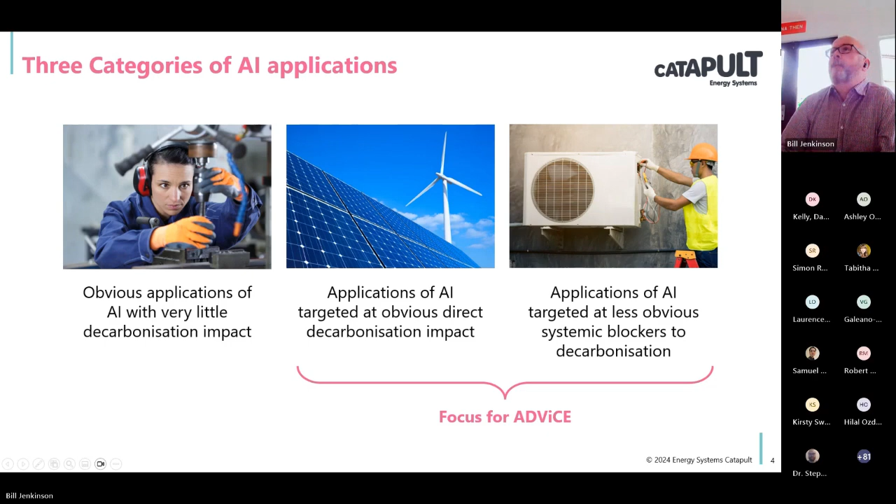For this particular view, we're looking particularly at the one highlighted as number 1, which is unlocking domestic decarbonisation. There are other calls and other challenges highlighted here that you can read at your own leisure.

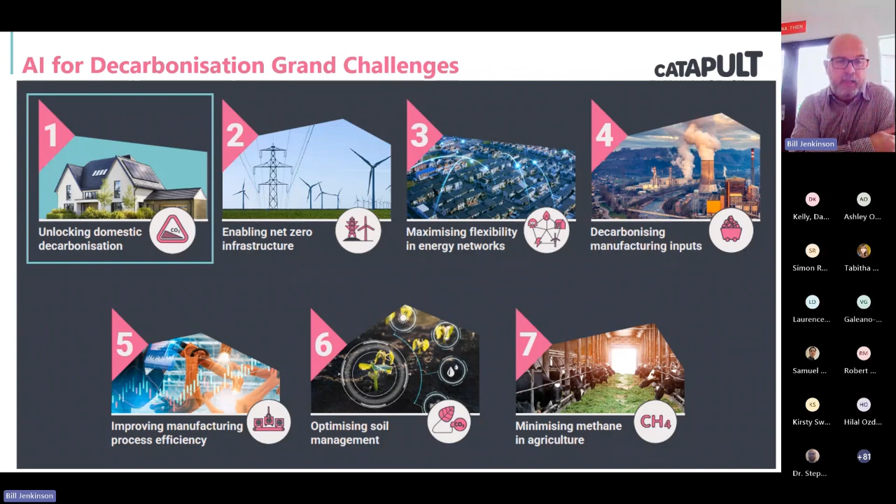So the big headlines here: 80% of UK homes are heated by natural gas currently, and 80% of home carbon emissions come from heating. This excludes lifestyle choices, which are around maybe flights, travel, or diet. But what we're saying is that 80% of the actual home's emissions are from heating. Gas boilers generally have a 15-year life expectancy, but we are racing towards 2050, and we know by 2050 we need to have reduced carbon emissions from heating by 95%.

We recognise that there's no silver bullet, but we also recognise that heat pumps and district heating are the leading low carbon solutions for home decarbonisation currently.

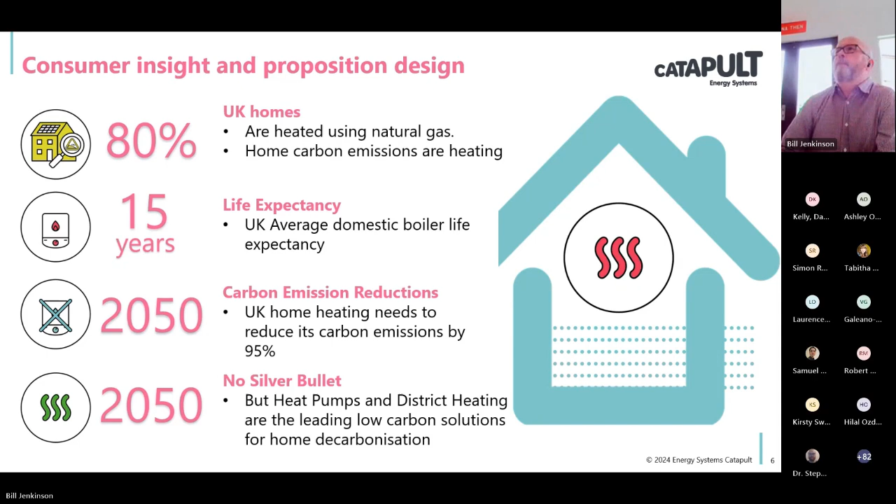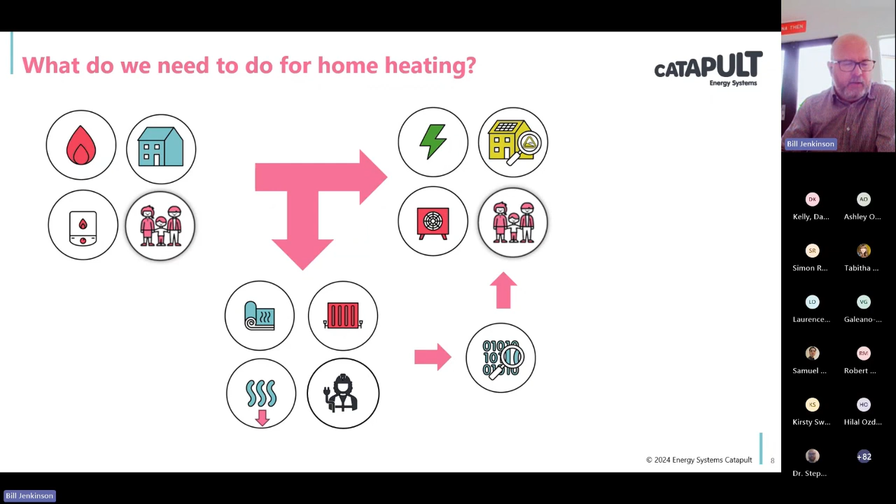So the first topic we're going to get into today is heat pumps. What we're looking at here is what we need to do, and the thorny issues with heat pumps. We need to move from left to right, from gas boilers to electrically powered heat pumps, from fossil fuel boiler solutions to solutions that can harness renewable energy sources.

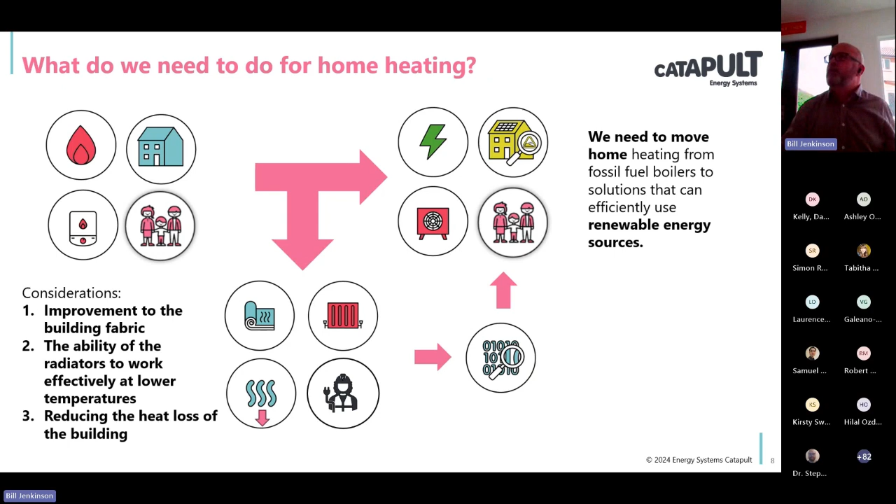But there need to be large design considerations, and installers need to consider more about how radiators work at lower temperatures, but also reducing the heat loss of the building overall through improvements to the building fabric. This all creates data that needs crunching to actually do careful design.

So this is an example of how a gas boiler works and how a heat pump works, in terms of what the kilowatt input would be, what you get out of the boiler, and what the typical cost per hour would be for a gas boiler compared with a heat pump.

Now worryingly, you'd say at this point, wait a minute Bill, it's always going to be more expensive to run a heat pump than a gas boiler. But we're using this SCOP of 3 just because it's simple, and it gives you a simple idea of how a heat pump actually works. So we take 1 kilowatt of electricity, we have 2 kilowatts of renewable energy coming in, and we get 3 kilowatts of heat out.

This gives you an overall idea of how it works, but we can do lots of things to determine how we're going to improve this heat pump value back to the end customer. So if we look at the SCOP, the seasonal coefficient of performance, we can improve it, or we can adjust the price we're paying for electricity versus gas, known as the spark gap. The other thing this demonstrates clearly is the high carbon impact of gas boilers compared with something like a heat pump.

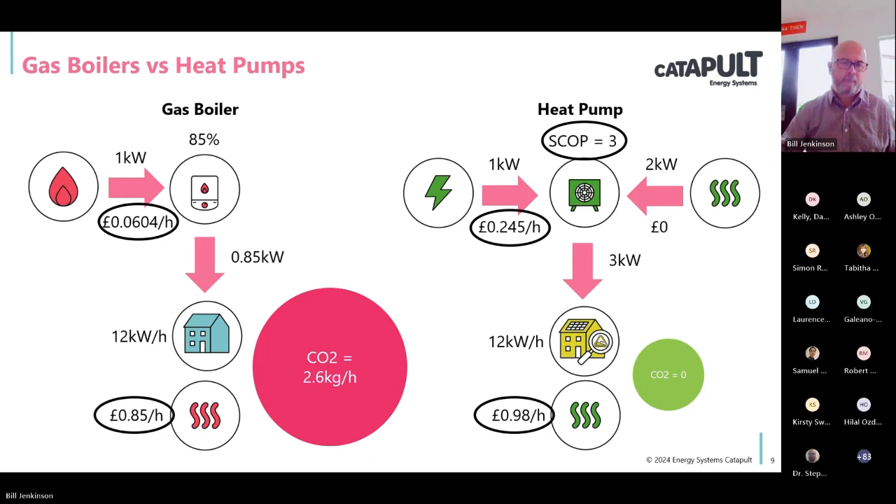So why is designing a heat pump important? Most UK homes at the moment, as we've said, use combi boilers. These are instantaneous hot water devices, so once you turn your tap on, the boiler fires. It instantly heats cold water to hot by using high intensity energy sources.

Generally these boilers are oversized for space heating, and installers have never really had to consider the design of the heating system in relation to the size of the boiler. Gas boilers generally are one size fits all, but this is not the case for heat pumps.

If heat pumps are undersized, they will not provide enough heat, resulting in high heating costs and ineffective heating. So I think we see this in reports quite often, that heat pumps don't work. They do work, they've just been designed badly or specified badly for the scenario they've been put into.

Oversized heat pumps can also be problematic. What tends to happen, if you understand how a heat pump works, is that you won't get the full benefit of the heat pump because a lot of the power is used with the compressor starting up, and you don't get the full advantage of the renewable heat that's there to be harvested. So if you get large cycling, it leads to poorer performance and higher heating costs.

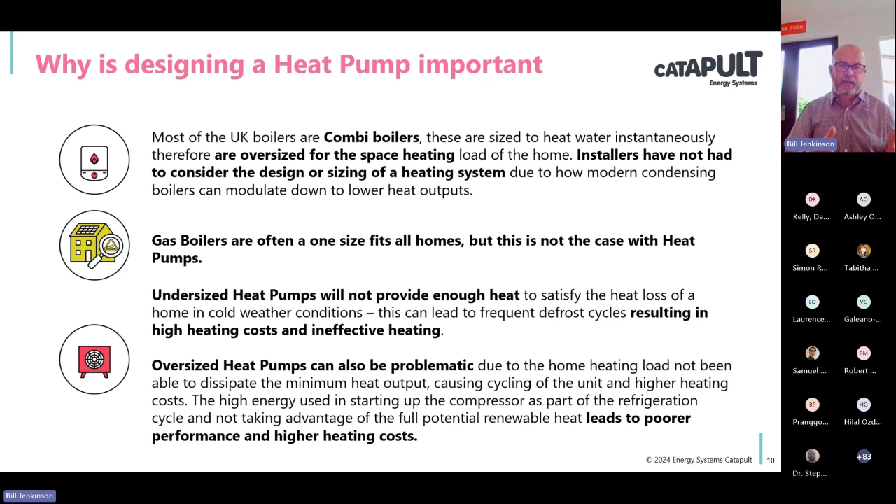We've tried to map this in terms of systemic blockers to rapid heat pump adoption, which are around design challenges, leading to complex and time consuming installations. This leads to negative perception, but also high upfront costs. There's a skills gap that's been recognised here, as we spoke about. The sizing of heat pumps is difficult, which also leads to negative perception, because if you don't know how to size a heat pump, you're not going to recommend one to an end customer.

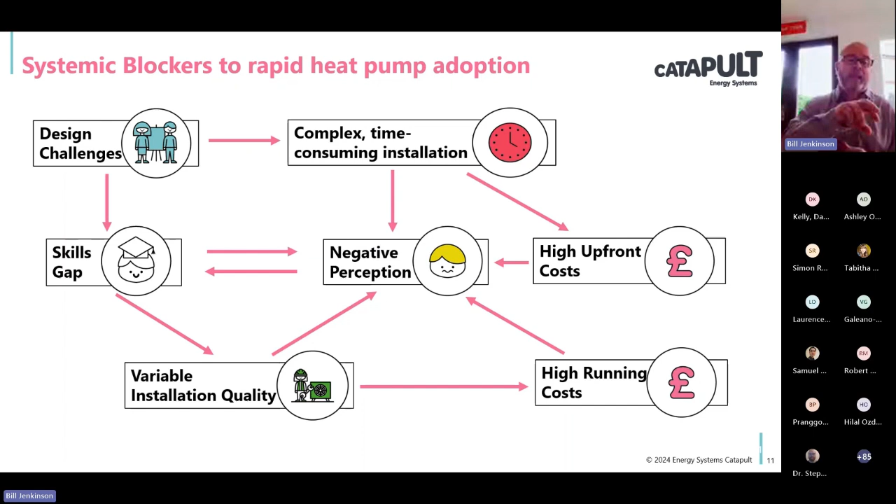There's variable installation quality, which can lead to higher running costs, which again leads to negative perception of heat pumps. So what can we do about it? I thought it'd be useful at this stage to actually show the as-is journey.

So generally, if you're a customer and you ask an installer for a heating solution for your home, they're going to recommend a gas boiler. If you're really interested in a heat pump and you go to an installer and ask about a heat pump, you're probably going to get recommended a gas boiler anyway.

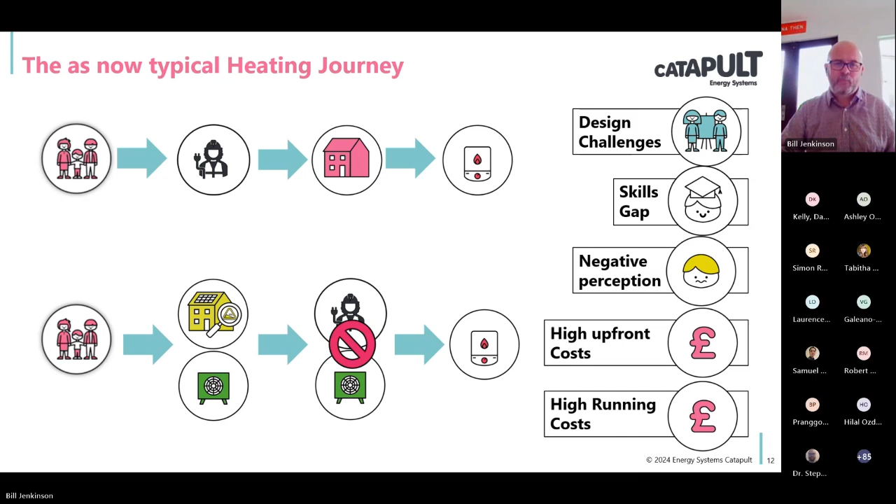If you're lucky enough to find a heat pump installer, what ends up happening is you end up with quite a long process compared with a gas boiler, the as-is now journey, because you've got some design challenges, complex time-consuming installation. We know we'll get a variable quality of installation at times, and there are higher upfront costs and a higher running cost.

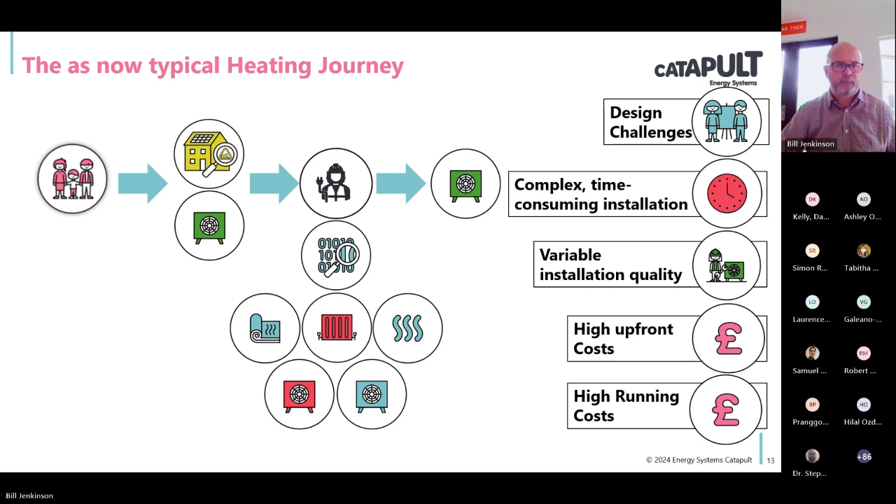What does this really mean for a heat pump, and how AI could be used to actually size a heat pump more correctly and bring in bigger data sets? We know at the moment there's lots of data out there about existing housing stocks. This will grow in the future, and we will get better at feeding the AI solution, which can better predict what these houses need. So you've got the bits about housing stock and the fabric, and how the fabric and the radiator sizing can be fed into this AI system.

And then the heat pump characteristics can also be fed in, which leads to a direct AI customer relationship, which then can inform the installer about the right heat pump for the right home. This will eventually lead to lower installation costs, less human error in design, an OEM-agnostic, manufacturer-agnostic heat pump best fit. It'll lead to improved heat pump performance and leaves installers to focus on what they actually want to do, which is install.

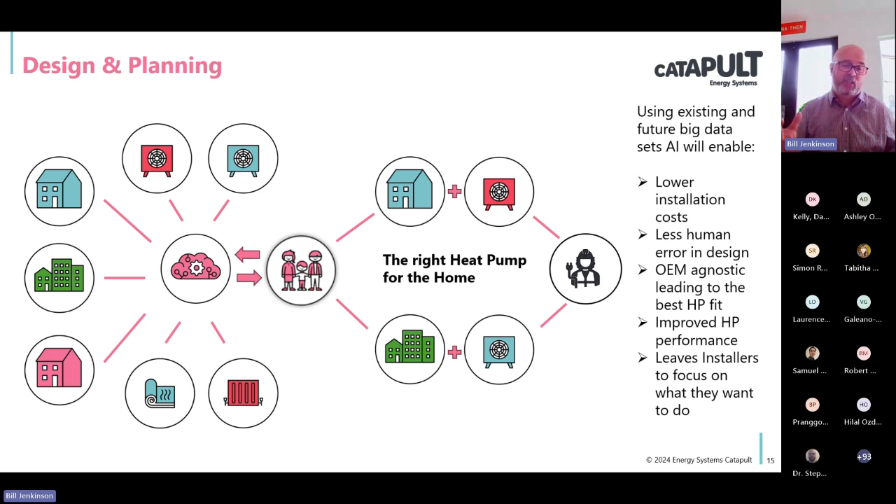Maintenance and management. So when we think about what AI could do from an overall control perspective for a heat pump, we can learn about the home environment as it's running the heat pump. It can adjust automatically and get the heat pump to think about how that home heats up, how the home will retain heat, about the customer's comfort needs and how it can meet those needs more effectively.

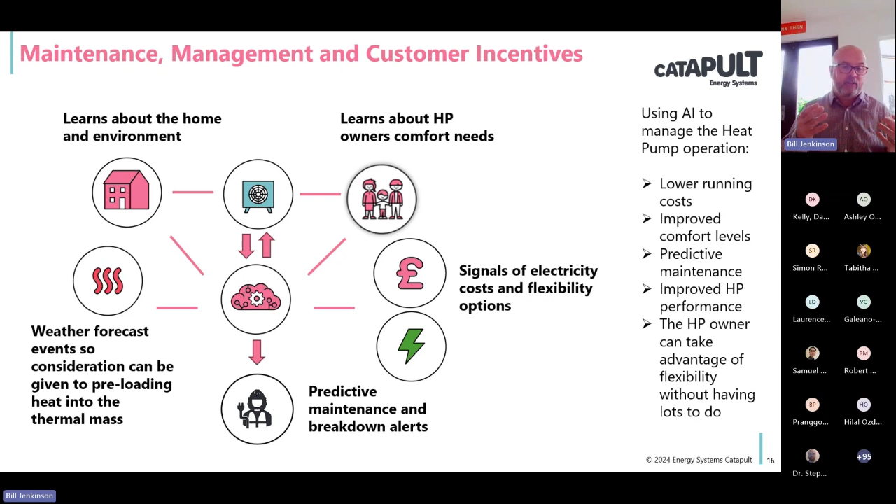It can also take signals from the electricity system to actually bring in better costs in terms of electricity, but also take advantage of flexibility options. It can look at weather forecast data and consider preloading the heat into the building. But it can also help with predictive maintenance and breakdown alerts. This will lead to lower running costs, improved comfort levels, predictive maintenance, improved heat pump performance, and the heat pump owner can take advantage of flexibility without having to do a lot of work.

The next category we wanted to highlight was district heating. So what is district heating? District heating networks are macro solutions for cities, towns, and high density urban environments. The network will contain an energy centre that captures, generates, and stores large amounts of heat. These centres can utilise low carbon energy generation and waste heat from industrial processes. Large insulated pipes distribute heat across the network.

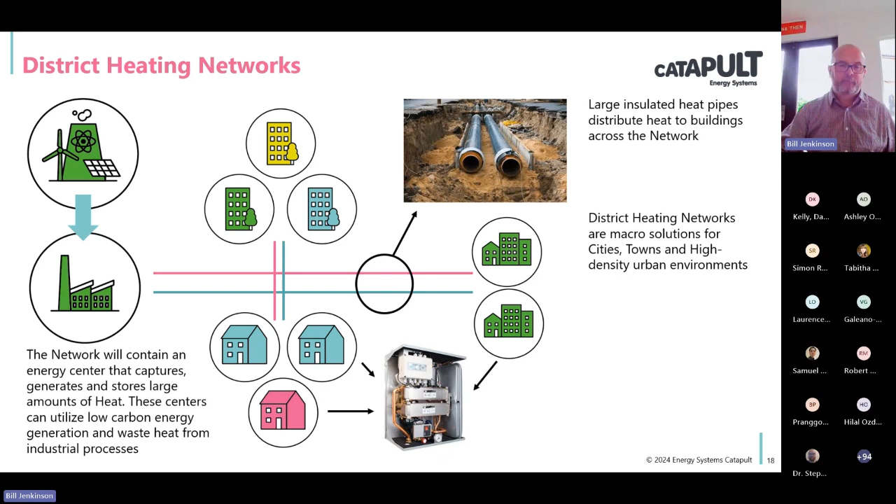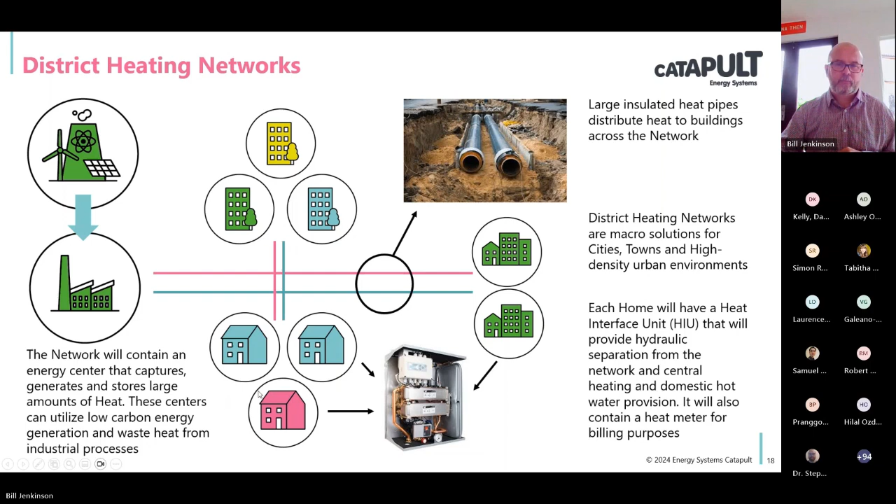Each home will have a heat interface unit that will provide hydraulic separation from the network and central heating and domestic hot water provision. It will also contain a heat meter for billing purposes. District heating networks require large capital investment to be built and a certainty of heat supply over a long-term perspective.

There are key stakeholders involved in district heating. The network operator runs the whole network. The investor stakes the money up front and brings it back, wanting a rate of return for investing in this infrastructure project. There's also the customer, who is locked into a heat agreement and has not got much choice in terms of being able to switch away from these heat networks. So it's really the network operator's duty to balance the return of investment from the investor's point of view and to be fair to the end user.

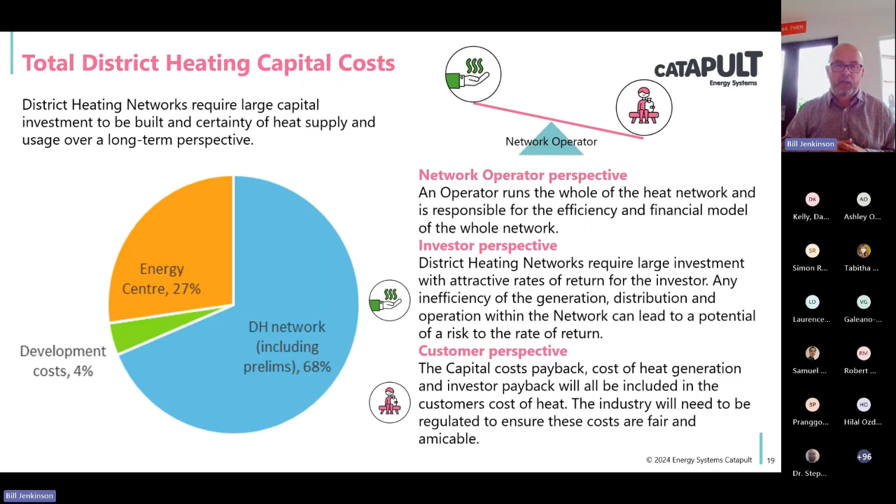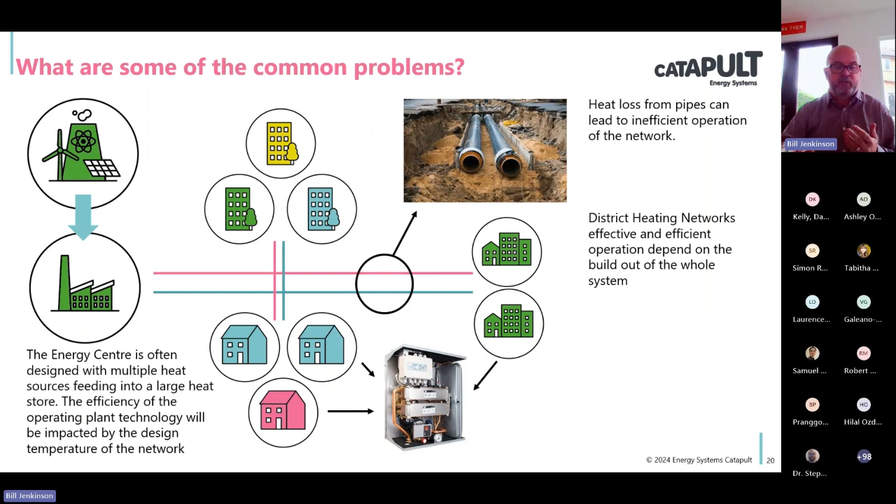Common problems on heat networks: district heat networks' effective and efficient operation depends on the build out of the whole system. What I mean by that is you've got to have certainty of the supply of heat, otherwise you might have oversized or undersized the whole of the network. The energy centre is often designed with multiple sources of heat feeding into large heat stores. The efficiency of the operating plant is impacted by the design temperature of the network. The heat loss from pipes can lead to inefficient operation of the network, because if you've got higher temperatures, you're going to get worse heat loss.

HIUs are based on providing instantaneous hot water and space heating. To generate instantaneous hot water effectively, it requires large amounts of heat from the network. HIUs are not always commissioned well, which will waste energy.

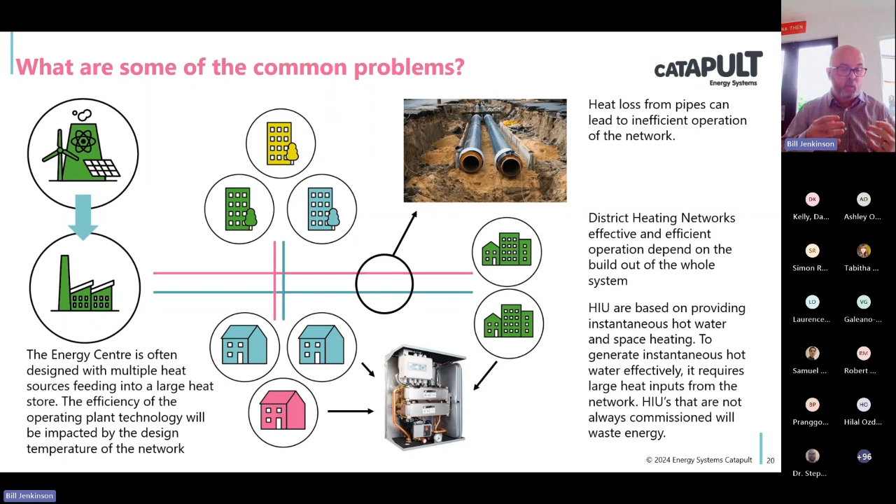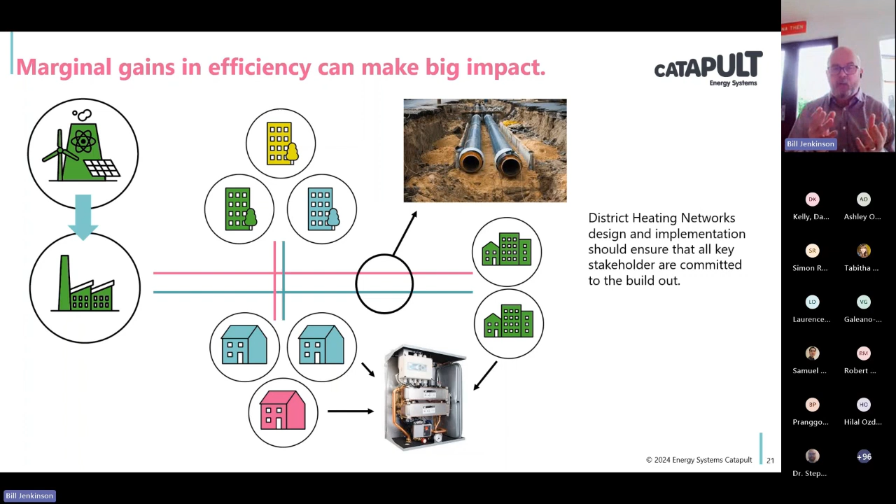So when we look at this in a macro sense, marginal gains can make a big impact here. District heat network implementation should ensure that all key stakeholders are committed to the build-out.

The energy centre will run more efficiently at lower temperatures, and the ability to not pump when heat's not required, or to ramp the pumps down and balance the heat across the network, is crucial to an efficient operation.

Heat loss from pipes can be minimised through better insulation and installation, but also from lower network design temperatures.

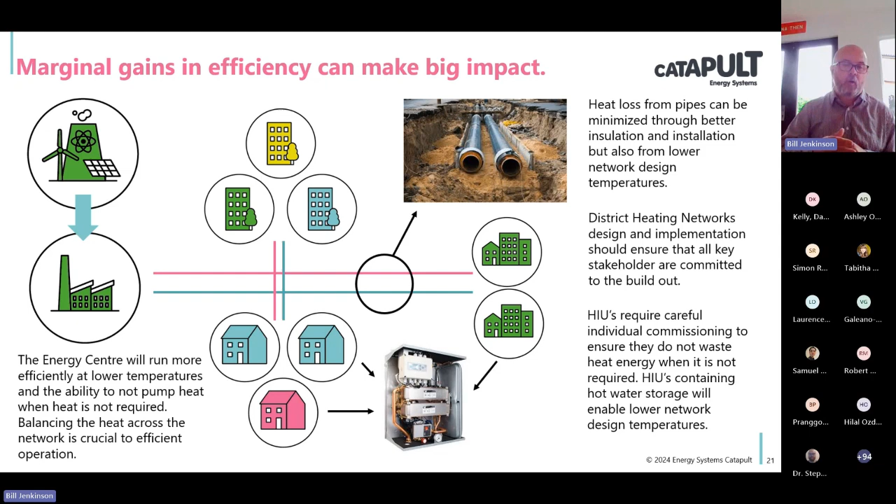HIUs require careful individual commissioning to ensure they do not waste heat when it's not required. HIUs containing hot water storage will enable lower network design temperatures.

So the AI challenge categories, again, we're just re-emphasising: design and planning, maintenance and anomaly detection, management and operation, and incentives and consumer support.

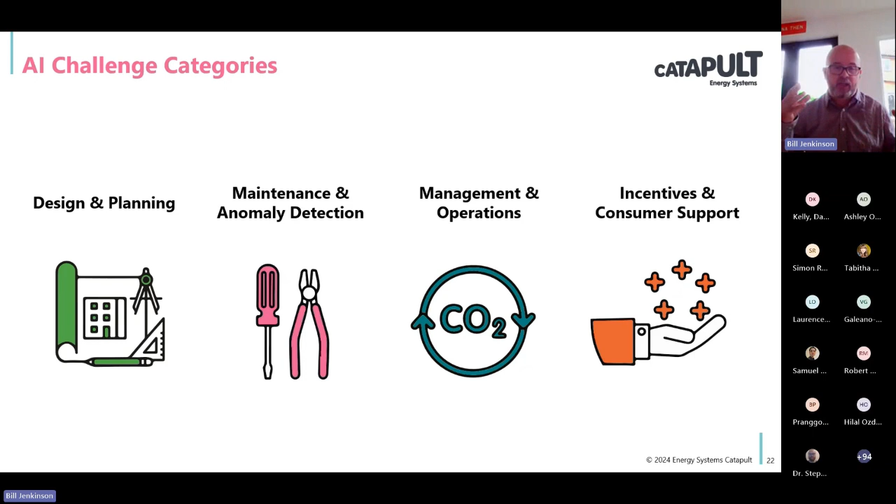So how can AI help here? AI can play an important role in the planning and design of future networks to ensure that they have certainty of efficiency of the whole network.

It could be used to run complex models that offer options and provide fair options and fair outcomes for customers, and enables the operator to guarantee with confidence the offer of a high IRR for investors.

Optimization of the whole network, commercial optimization, a fair deal for customers, and the ability to provide a transparent way of explaining to customers who have little choice to switch suppliers.

AI could also be used to better manage heat networks and model maintenance and breakdowns. This will grow in predictability using an automatic feedback loop.

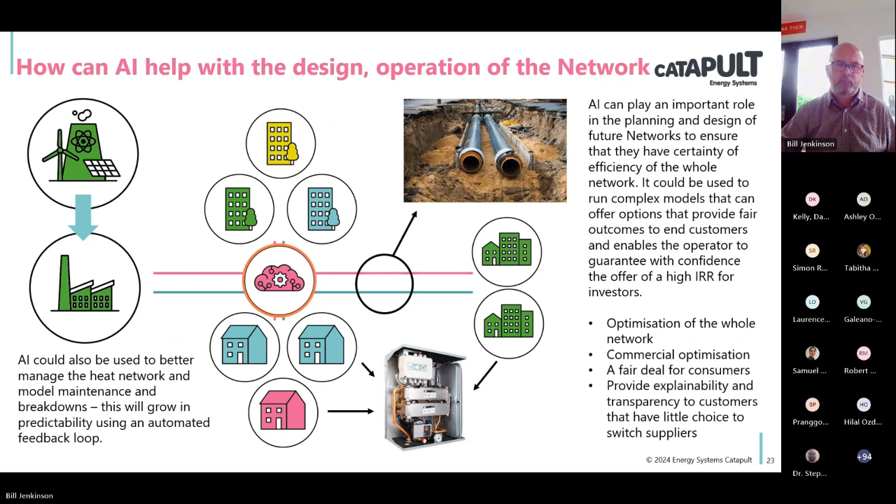Well excellent stuff. Okay ladies and gentlemen, I want to start off by imagining a world where every home not only shelters its inhabitants but actively works to create a sustainable future. And today I think we stand on the brink of a technology revolution where artificial intelligence and machine learning converge every day, transforming our homes into intelligent hubs that optimize energy use and ultimately reduce costs, and probably most importantly, drastically cut our environmental impact.

I think a crucial part when we talk about AI and machine learning is that this isn't necessarily just the future, this is the reality. We're actually creating these smart connected homes right now. So my name's Simon Roberts, I'm the CEO and founder of Heatio, and fundamentally we're on a mission to make clean energy affordable to everyone.

We do this by developing technologies and funding solutions that enable the transition to renewable sources of energy. This includes design tools which enable the use of energy data to simulate the impact of energy efficiency improvements in your homes. We also develop home energy management systems to optimize energy usage, and we enable you to earn from those energy assets in your home through energy trading markets, with the aim of converting consumers into prosumers. So we're using data to tackle fuel poverty, and we're using data to tackle climate change.

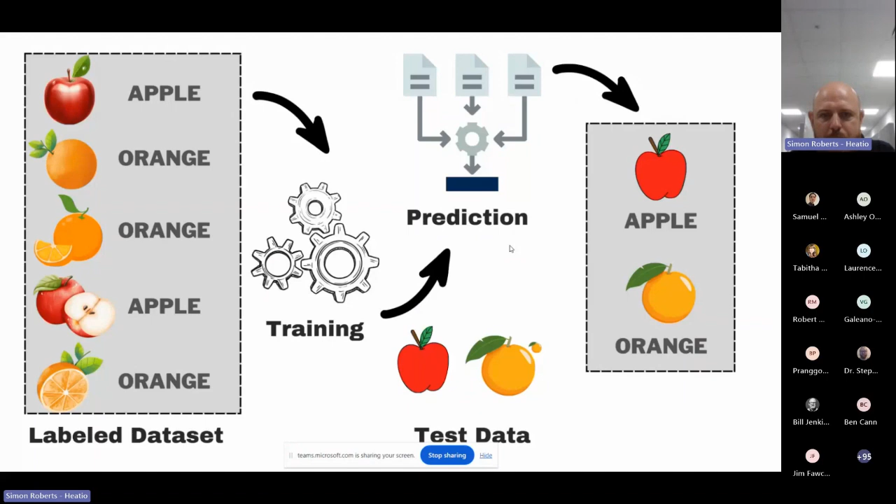Now, in everyday living, we don't necessarily need that too much, but when we start to think about that in the concept of AI, what we're actually asking for is input. We need data input in order to be able to make informed decisions. And I think crucially, when we start looking at that in the form of energy management in people's homes, and some of the points that Bill covered there in the presentation, currently we don't use data to make a lot of the decisions that we make. And I think probably the most obvious one is when we're designing heat pump systems. Bill mentioned the process that you go through to design a heat pump system, and that is a very detailed room by room heat loss calculation.

And as a heat pump engineer for over 20 years, I've done plenty of those calculations, and the theory behind it is correct. When you have a boiler, you can, within reason, do a relatively finger in the air calculation to determine what the heat loss of that home is. Maybe you look at the existing boiler and replace it like for like in terms of the output required. If the customer's not having any issues with the boiler meeting the home's heat demands, then you can pretty much replace it like for like. When you start getting into a heat pump, we don't have that same opportunity. We have to design these systems very specific to the home.

And the route that we go down is we send an energy assessor in who will measure each room individually and any of the building elements, so any windows and external doors, and we'll then make assumptions around certain factors. We will assume what the makeup is of the insulation, for instance, within a wall. Now, we may be able to use building control data to understand what that should have been at that time. But for all we know, on that particular home, on that particular day, the builder was having an off day and didn't put the right level of insulation in, or maybe they've had cavity wall and it hasn't been done correctly. So even these very detailed calculations, which take a huge amount of time and add to the cost of a heat pump installation, fundamentally, it's somebody with a clipboard or a piece of software inputting data on their best guess assumptions.

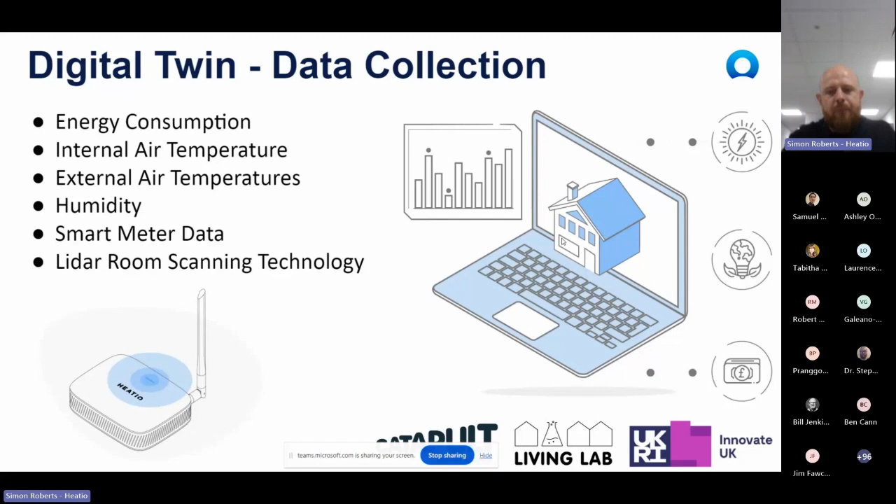What that gives us the ability to do is calculate something called the heat transfer coefficient. Specifically, if we go for a winter period where we have a period of time where the internal air temperature and the external air temperature are around 7 degrees difference. If we can calculate that HTC in those very specific moments, we can actually start to look at what the actual size of the heat pump is. But more importantly, we start to get to this ability where we can start to simulate the impact of a heat pump on that home, specifically based on how that user, that homeowner, uses their home.

So we had a client that came to us that was interested in having a heat pump. We went out, we did the heat loss calculations for that property. We then did what we're required to do under MCS, which was take the space and water heating data from the EPC and use that to calculate how much that homeowner would spend on their heating. And the reality was, in that particular client's case, they very rarely had the heating on. So the actual kilowatt hours on their EPC for space and water heating was very different from the actual.

So with these simulation tools that we build, we're able to simulate the impact of a heat pump on that home based on how that person utilizes the energy in their home, how their occupancy is, how they heat their home, how they use hot water. And I think as well, as Bill touched on earlier, you then start to look at what the seasonal coefficient of performance might be for that heat pump. And actually, when you run those calculations for somebody who very rarely has the heating on or has it at lower temperatures, it might be that a heat pump in isolation is not actually the best choice for that particular customer.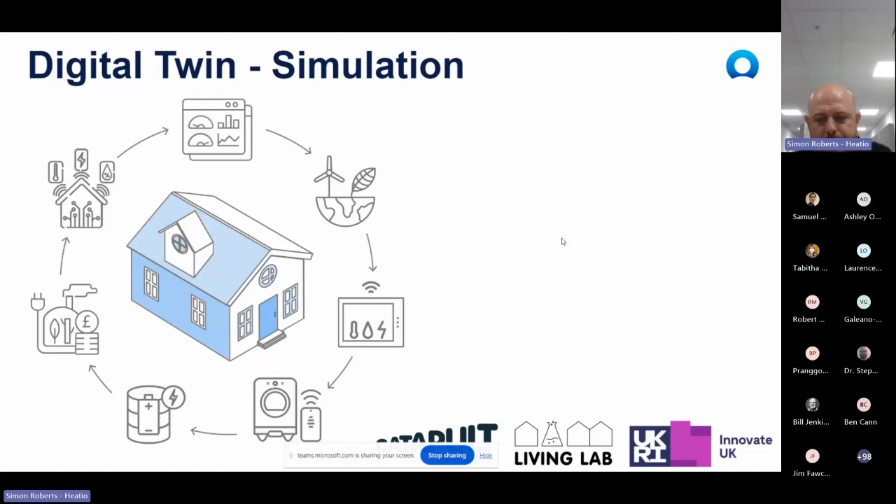And that's a crucial step for us, is we need to be able to give visibility to our clients on how their home is performing currently and what it could look like once you start to add these technologies in, so they can start to make informed decisions based on how they use the property, and also being able to simulate things like how their comfort levels might improve. It's absolutely fundamental to be able to move from a data-driven model into an AI and machine learning-driven model by having real-time data feeding into the data sets that sit behind the system.

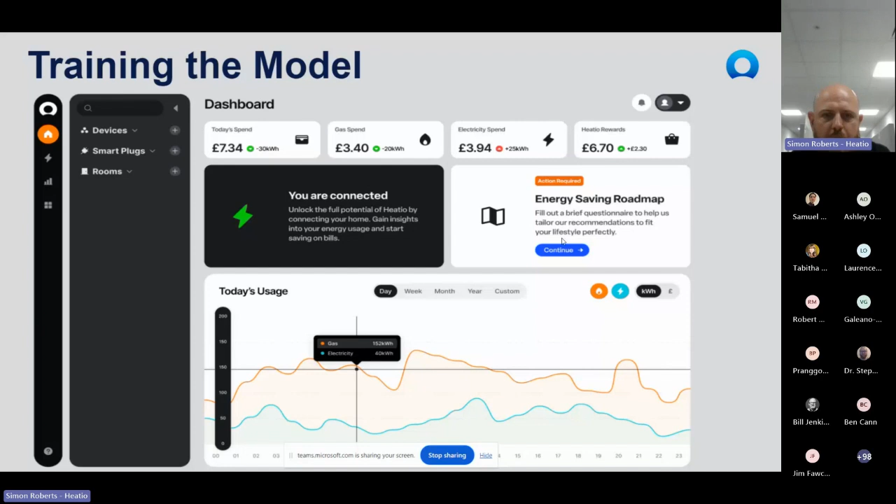And we know we need to encourage more homeowners to actively engage in the journey right at the start, so we can start pooling their data and seeing how their homes perform, with a view that for those that do then move on and have the technology installed, we then start to monitor this technology and see how it's actually performing in those circumstances. And this is how the model starts to become trained. We've fed the data in, we've made some assumptions, and then the model starts to get trained based on how those systems are actually performing in those homes, in those individual models. And we start feeding that back into the system.

So that goes right back to the start. That goes right back into our predictions. If we predicted the home was going to perform a particular way, we've now got the data to determine whether or not our predictions were correct. And that will reinforce any future predictions moving forward.

And that goes right the way across the technology stack, but it also looks at things like the climate data and solar radiance based on particular orientations of homes and orientations of panels. So we've got to look at ways in which we can use machine learning techniques, both in that initial prediction of how the home's going to perform and taking the data to constantly train the model and feed back in.

But we can also then start to look at ways we can use that data to manage the energy usage in that home. So if we predict a way that that home's going to perform over the next, say, 24 hours, when we start to take into consideration things like agile energy tariffs, and we send those commands down to the technology and tell it how to perform over the next 24 hours, we can then monitor whether or not we achieved the objective, whether or not we achieved the comfort level, whether or not we maybe overshot the comfort level, maybe we were under the comfort level. So the system starts to learn organically on a house by house basis how to perform.

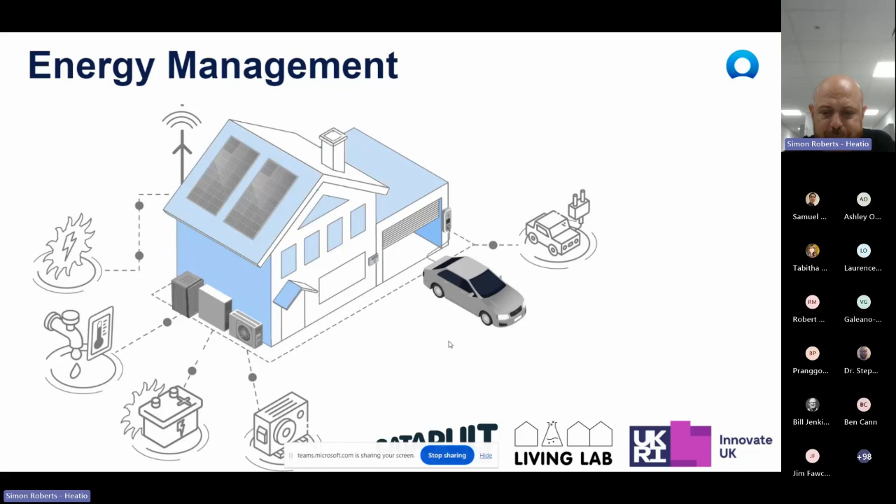And that's what we're starting to do with our data sets. We're really starting to pull all that data in of the actual performance of these systems and running that training on the model to make sure that what we're predicting it can do and how it should perform, whether that was the right decision to make, and ultimately then making better decisions each time to improve the performance of the technology within the home.

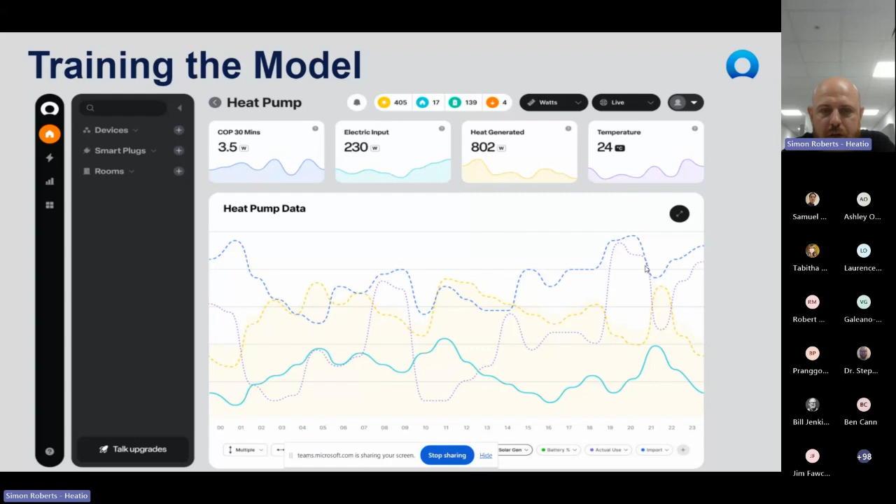Where this goes next, and where we see the technology really starting to impact the infrastructure investments from network operators, is by bringing each of these connected homes into our virtual power plant, where we're starting to look at street by street simulations. So actually looking at those customers who are in the consideration part of the journey and what would be the impact on the infrastructure if they were to make the switch to heat pumps, battery storage, or EVs, but also looking at ways in which those homes that have made that switch and have got that technology installed can actually be used to support the grid. And again, it's pure data.

If we can see how the grid is performing in particular circumstances, and we know how those homes are going to perform based on the data that we're collecting, being able to send those signals down to the technology to either throttle back during periods where the grid is under pressure, or push energy to the grid in times at which the grid is in need.

And we really start to build that kind of energy trading and the energy trading markets around that, to enable homeowners who maybe historically would have had a high capital cost to having the technology installed. We can now look at ways in which we can bring innovative funding solutions in, when we can validate that there is a revenue stream there through grid flexibility to actually underpin some of the capital cost for the installations.

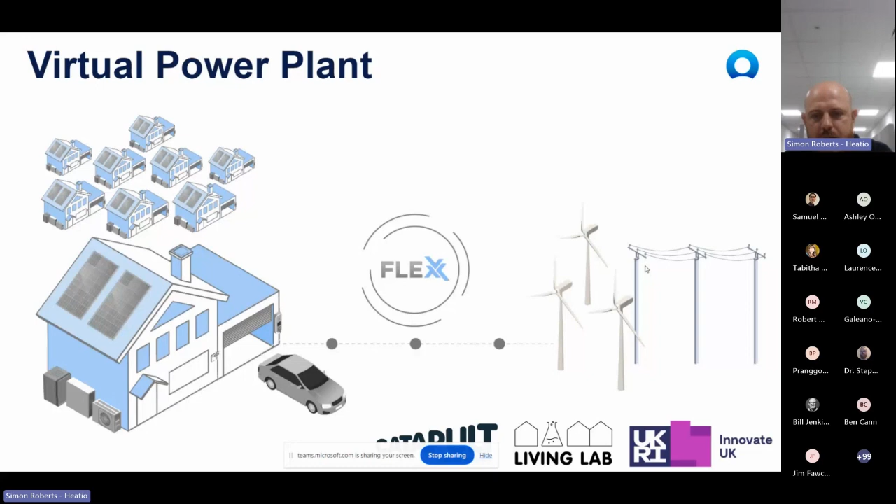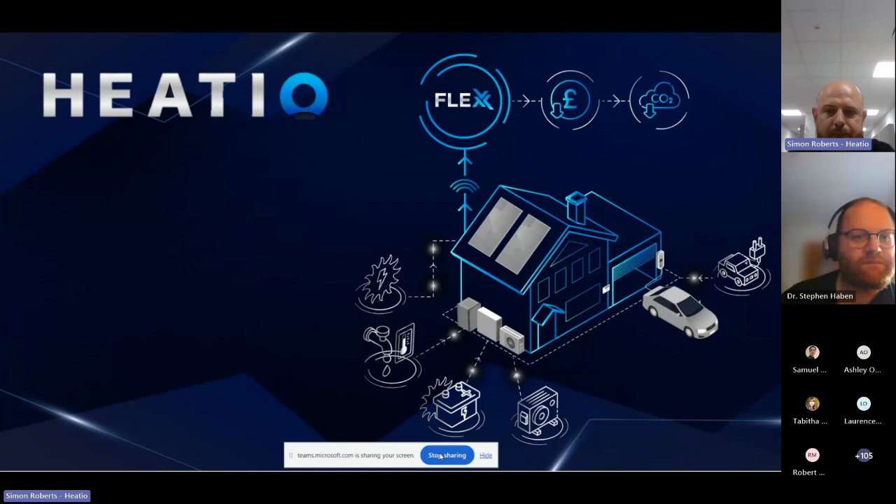John asks, I understood that when designing a heat pump system, you're required to assume certain target room temperatures, etc., rather than using the particular habits for the specific customer, in order to qualify for the government grant. How do you get around that when taking a more data-driven approach?

Yeah, so when it comes to sizing the heat pump, absolutely right, ensuring the heat pump is big enough. When we do our calculations, we will simulate the heat transfer coefficient at those target temperatures. I think where we use the digital twin model is more to simulate performance, and that's probably one of the biggest challenges homeowners have in this journey, actually getting comfortable that the predictions we're making are based on how they use their home rather than an EPC, for instance.

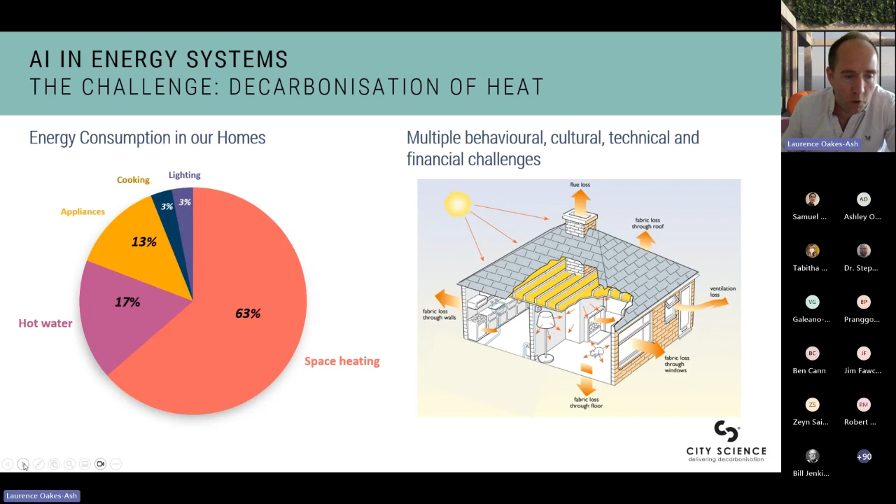Heat is a big challenge—23% of UK emissions—and to achieve net zero, virtually all emissions from heat need to be eliminated. The challenge in heat exemplifies the scale of the net zero challenge. If you've worked in this space, there are multiple behavioural, cultural, technical and financial challenges, one being simply the upfront cost of doing the analysis needed to make the right decision. Heat networks are likely to be a big part of the solution—the forecast is that district heat could serve about 20% of UK heat, up from 3% today.

We were fortunate to work on a project in 2022 looking at how to reduce the upfront cost of heat network design, through automating the process and using generative AI. We worked with the University of Exeter and Professor Edward Keedwell, a Turing Fellow, on the generative AI components. As far as we know, it was the first use of generative AI in infrastructure, funded as part of the Modernising Energy Data Applications Programme by BEIS and Ofgem. The network build and design had to follow specific rules, so we used a physics-based model and a rules-based model to design those systems, automated so you could run it multiple times—that's where we applied generative AI techniques.

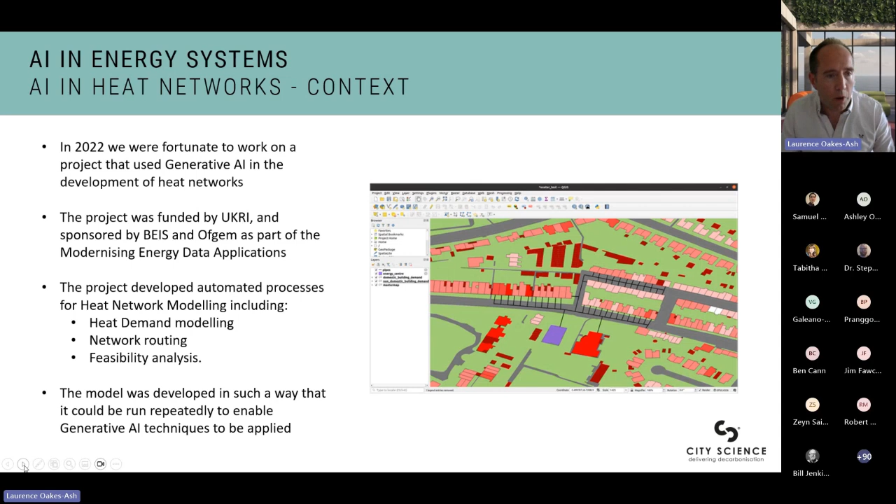Since that project, it's probably worth updating you on some of the things that have changed. One of the key things that's changed is heat network zoning. Heat network zoning is due to come in 2025. This aims to be a further catalyst for district heat network deployment.

Heat network zoning aims to mitigate some of the risks associated with heat networks to accelerate their delivery. Those risks include uncertainty, so zoning aims to reduce the uncertainty regarding both the process for designing a heat network and ensuring there's connection demand for that heat network. It aims to reduce upfront costs by using a standardized methodology, and provide clarity on the roles and responsibilities at local and national levels around who's responsible for the district heat network design.

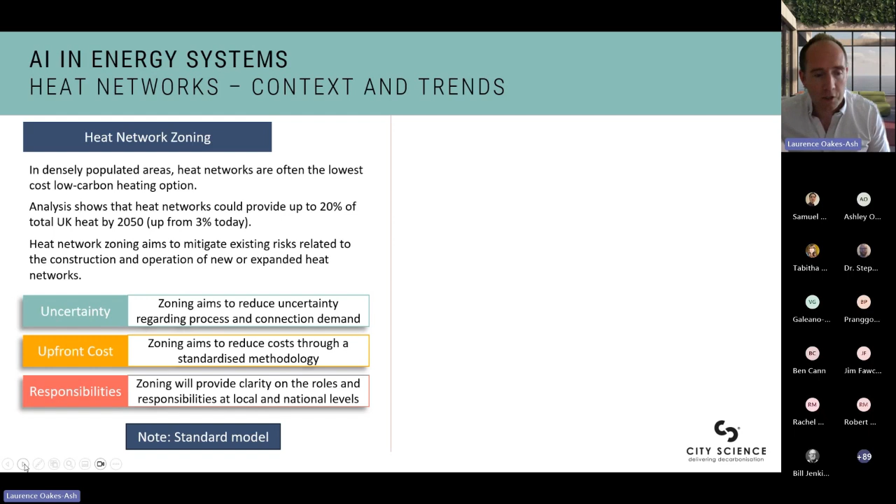One of the most important points from our perspective, having a district heat network, is that there's going to be a standard model, a standardized approach. We often see this with some of these critical pieces of infrastructure. We've been talking a lot about buildings, and equally in buildings, something like SAP is a standardized model. So one of the key things we have to bear in mind when looking at AI applications in this space is the role of standardized models. In heat network zoning, we're anticipating a standardized model, and we're currently working to make sure our model reflects what's going to be in that as well.

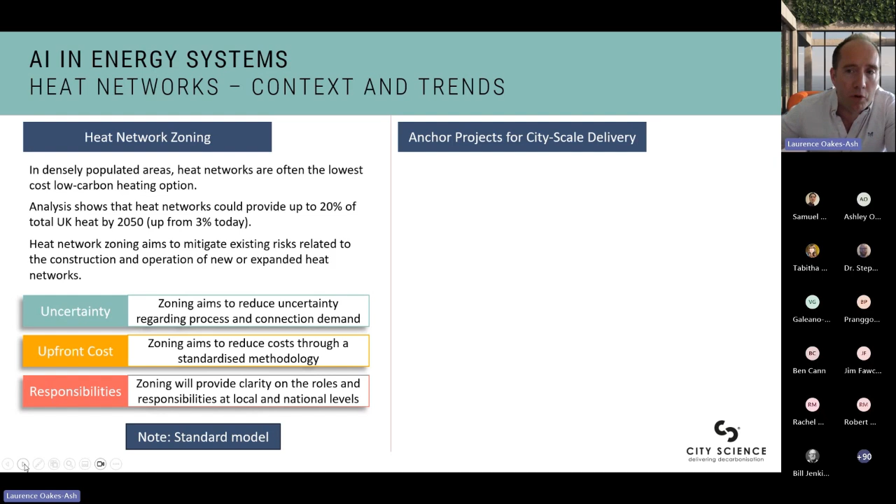The other key change, or more of a trend we're seeing, is the use of district heat networks as anchor projects for city scale delivery. Since Bristol City LEAP, a big citywide decarbonisation fund, more and more local authorities are looking to use their heat network opportunities as an anchor pipeline for larger investment. So actually being able to combine that district heat with other types of projects to optimise funding and optimise how much of their local area energy plan pipeline they can get delivered.

One of the big changes we're thinking about now is actually, whilst when we did that project we were optimizing the heat network itself, we're now thinking, well, what are the implications? We're obviously going to be thinking about optimizing the whole process at a city scale, which is going to involve a larger range of different projects as well.

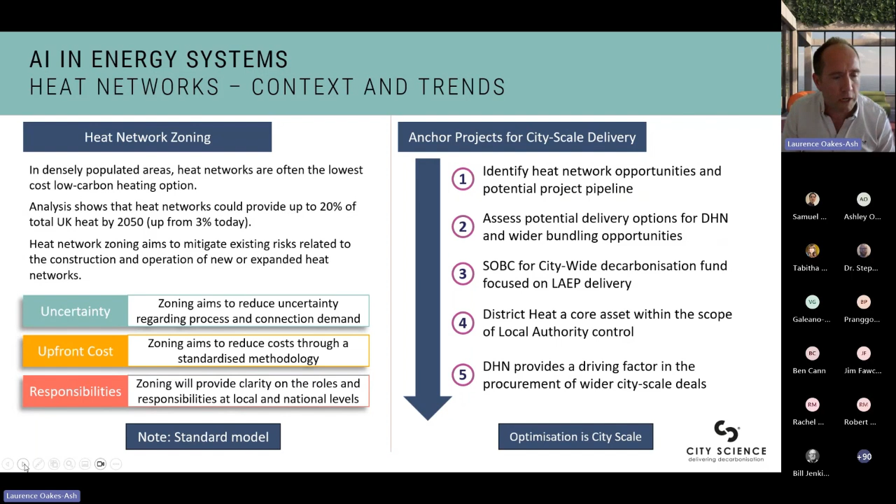In terms of what we did, and we talk about generative AI, I think it's probably worth defining what we mean. Certainly, since we used generative AI in 2022, ChatGPT has come in and been popularized. So the post-ChatGPT definition of generative AI, I think, has changed somewhat from what we originally intended. Generative AI, if you look at what people are saying it means today, is artificial intelligence capable of generating text, images, videos, and other data using generative models.

So we didn't do that. That's not what we did. We were very much using a physical model to be able to create a design for a heat network, and then we would run that multiple times. I know there's a lot of comments in chat about what's preferred, whether a physics-based model or an AI-based model is preferable. Certainly from our experience dealing with local authorities, one of the key things we need is transparency and trust. Energy systems obey the known physical laws.

From my perspective, when we're looking at things that need to be transparent, physics-based models actually do have multiple advantages over AI-based models. The key thing is that they're transparent and understandable. The second is that they provide a solid basis of prediction based on those physical laws, independent of however much training data you have. So it enables us to generalize much faster than we would if we were relying on training data. And they're actually simple to code and integrate into wider computational processes.

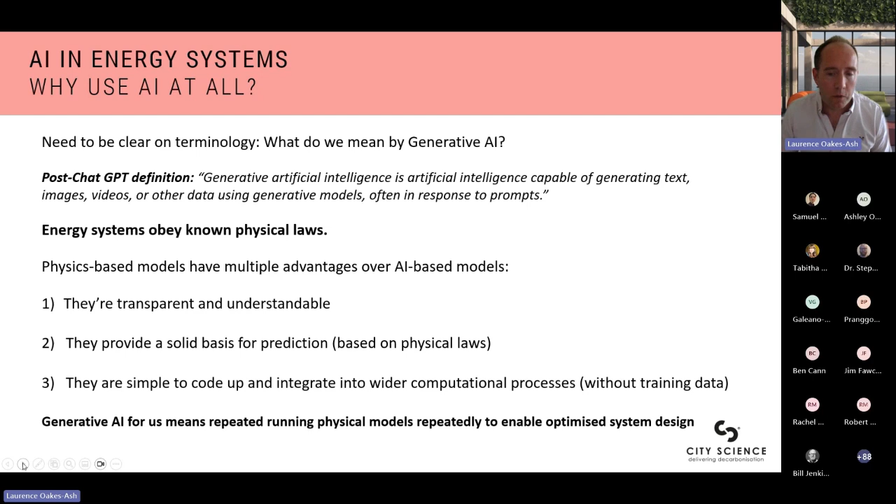So I think from our perspective, when we talk about generative AI, what we really mean is building a physical model and then running it continuously or repeatedly to be able to optimize a system using AI. That's not to say we shouldn't use AI, however, in any of these processes.

So if you think about a pipeline for an energy model, it might look something like this. You'll have some raw data, some sensors, maybe some background data that you get from national sources. You'll have a data store, maybe including some historic, some real-time data. Then you'll have some data processes, so maybe infilling data or fusing data from different sources. And then you'll apply some kind of model—that would be your energy model. This is really a context-specific mathematical model that's relevant to the questions you've got in hand.

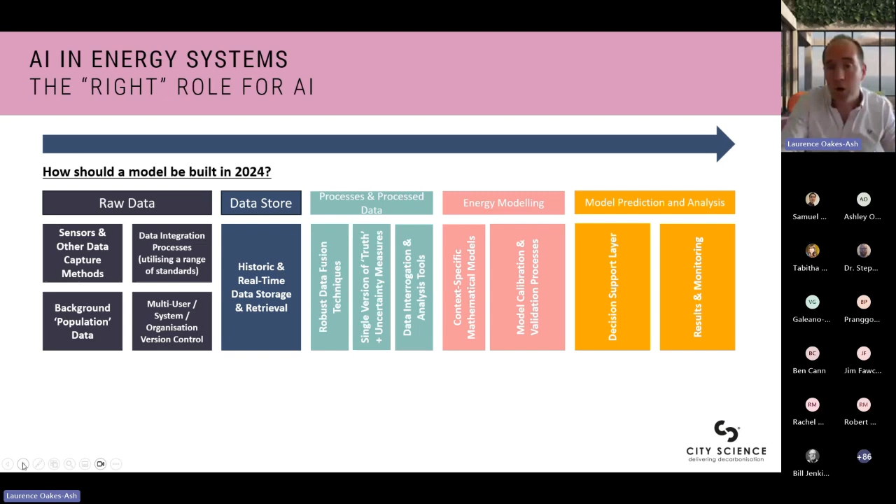You'll calibrate that model to various data sets as well. And then finally, you'll use that model for a specific purpose, really using it to support decisions. And that could be policymaker decisions, it could be homeowner decisions. It depends on the context.

And then if you've got a digital twin here, then there'll be a feedback loop throughout all this process, making sure that the system itself is also improving.

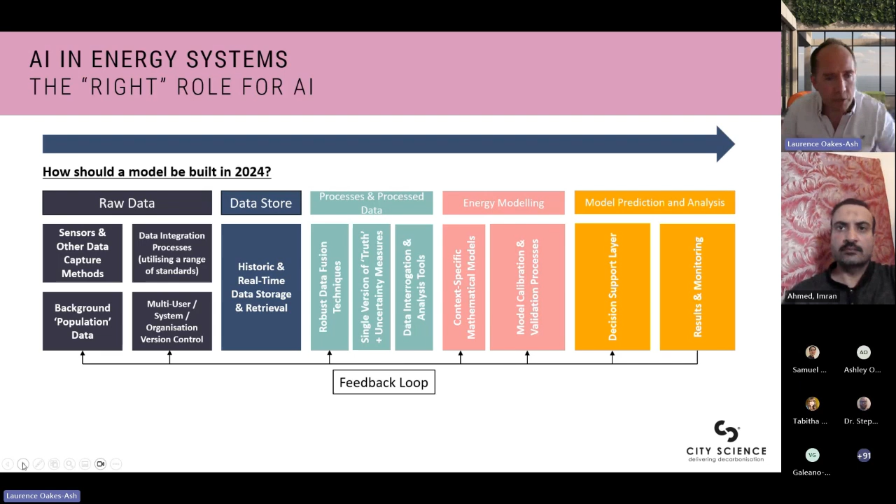Now, I think one of the key learnings for us is that working in the policy domain and working on things like district heat, it's really important that there is a human in the loop in these sorts of systems. So we wouldn't use AI for the context-specific mathematical model. We think there are possibly and most likely to be better opportunities for that, but equally we're dealing in a world where there are standardized models that we also need to be aligned to, and we need to be clear that we're aligned to those models.

But I think that there are four places, at least within a pipeline like this, where AI can play a role. So certainly capturing data, looking at using sensors or using drones or all those things, capturing data that we currently don't have in some of the other data sources that we've got available to us. That's number one. The second area where AI can be used is in either data infilling or in fusing data between different sources. We'll talk about some examples of that as we move through the slides.

The third area is around how you calibrate models, in particular if those models are fairly complex and you want to calibrate them in a way that is as robust as possible. And then the final piece, and this is kind of where we were with that generative AI project, is how you use models and how you use AI in combination to support decision making.

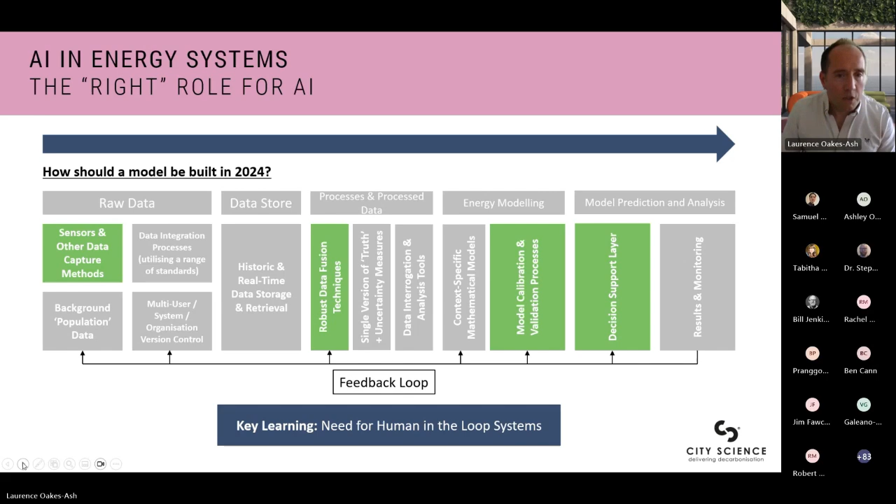So the rest of this talk, I'm going to give you some examples of the sorts of things that I'm talking about there. So the first example is really around how you can improve data processes. So this is just at the data gathering stage, and this is an example of using images to predict whether solar panels exist, for example.

Now, we talk about all of the sorts of features and all of the input data that you need for these domestic energy applications. Obviously, you might want to look at whether that home has solar panels. You might want to look at building geometries. You might want to get a sense as to the links between different building geometries that you currently don't get from something like an EPC record. You might want to look at how much space is available around that property for things like heat pumps and the deliverability of different measures associated with that building.

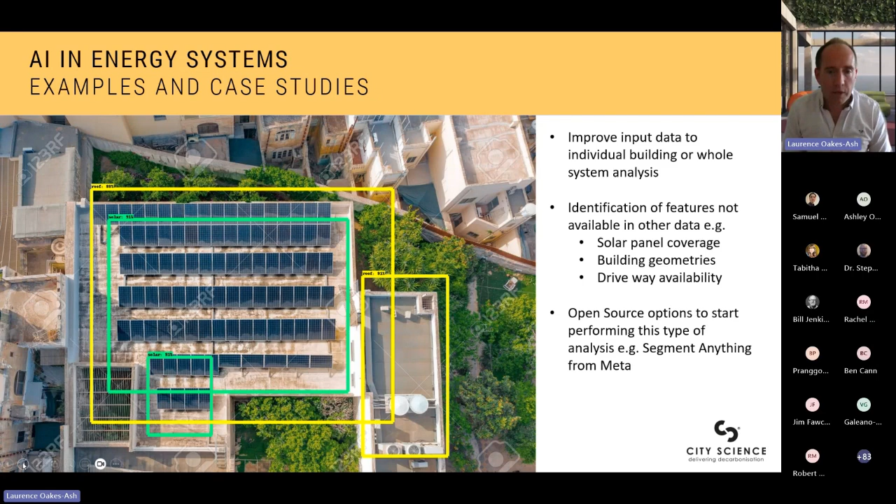So there's a whole range of things that you might want to look at using imagery or using drones. And there are a lot of places where you can go and get this sort of data. So people like Absolar do this, DigiLab do this, and there's lots of open source options that you could use to try and capture data in the way that you want to look at inputs.

The second application is really about infilling data gaps. Now, if we're thinking about things strategically, if we're thinking about a retrofit strategy, we want to have values for every single property. And if we look at things like EPC data or the NEED data, those things don't have values for every single property.

So we can use statistical or AI techniques to infill this data. And this is essentially what we did as part of the generative AI model build, because we needed to have heat demands for every property in a city, essentially, and we needed those processes. So this is an example within our Cadence 360 software of our UPRN-based heat model. So for every property we can provide a heat number.

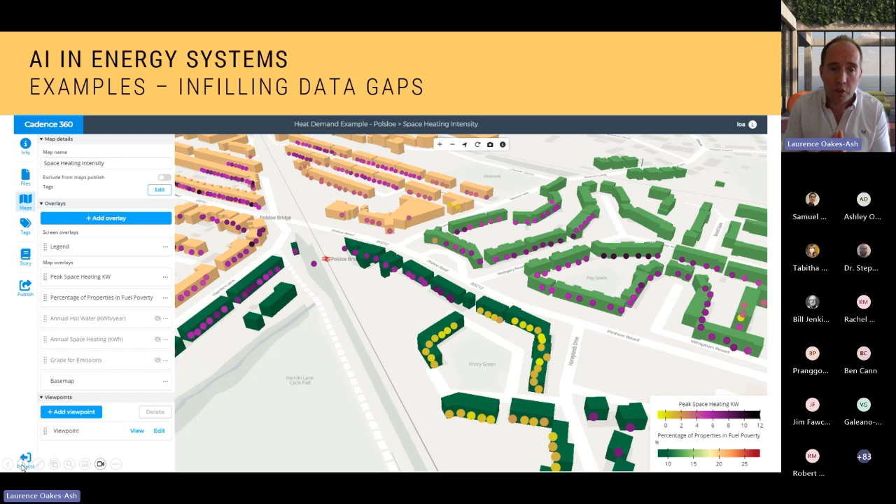Now, I think it's also important to note that we invariably also want to validate these sorts of data as well. So if we're doing a strategic study, whether that's a local area energy plan, whether it's a local heat and energy efficiency strategy, which is what I'm showing here in this case, that data, those heat models also need to be validated locally. And often this is a key part of that human in the loop process, especially if we're doing something that's going to be scrutinized by policymakers. We've got to make sure that data is validated. And often we're including local data sets as well that enhance that data and that prediction alongside the automated approaches. So I think that's a really important point here.

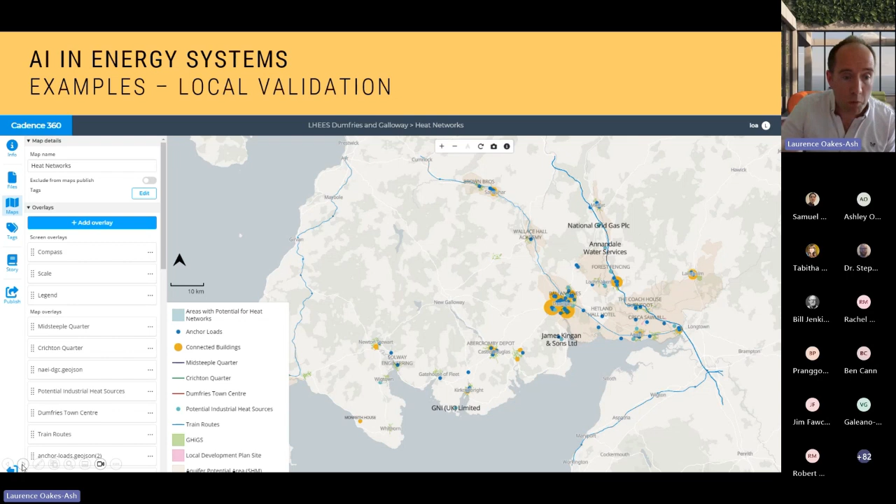We use that both when thinking strategically about analysis, but also when looking at individual properties. So this is an example of a local heat and energy efficiency strategy we've done where we validated the data and the approach so that it can stand up to scrutiny.

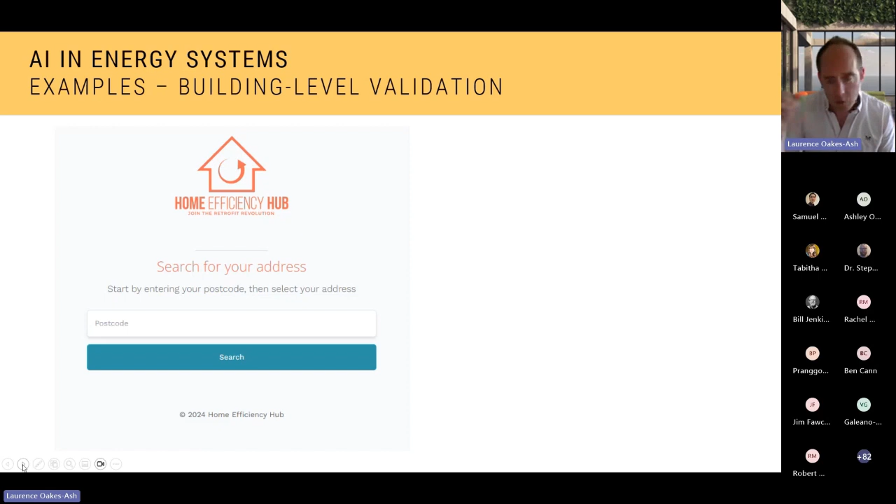This is also a more localized example. We have an app for retrofit. It uses the same data, so that for any postcode in the UK you can get an initial result. But we also enable, for every property, making sure the data is correct. So we give the best possible prediction, but it's got that human in the loop component, so that whoever's looking at this can say, well, actually I've got a different floor construction, or a different boiler than the one you predict for me.

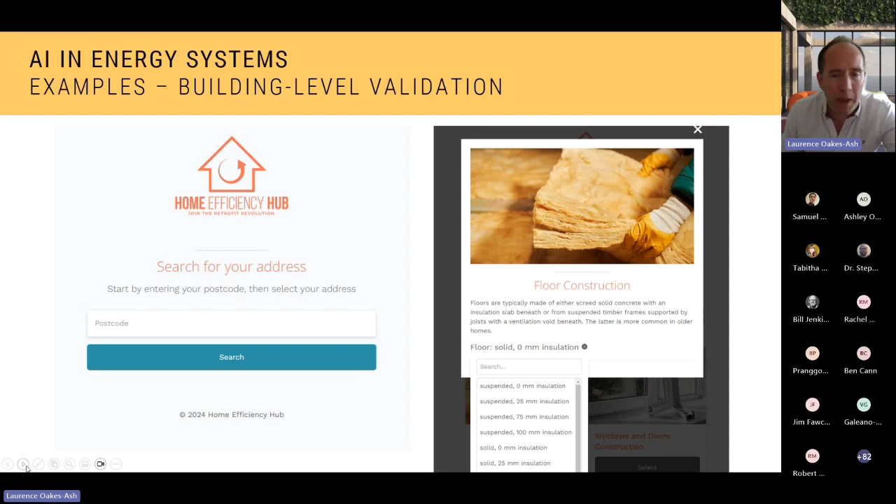So that we can get as accurate a version of the analysis as possible. And I think this application also demonstrates one of the benefits of separating the AI from the physical model.

We are able to provide retrofit recommendations and outputs, but what we've been able to do this year for this model is integrate the open source Home Energy Model, which was released this year by DESNZ. The Home Energy Model is essentially SAP 11. It's been released as an open source component, and because we've got this separation between the AI and the physics, we can then put in the new physics that's essentially going to be the official model for the UK, and use this to make the retrofit recommendations.

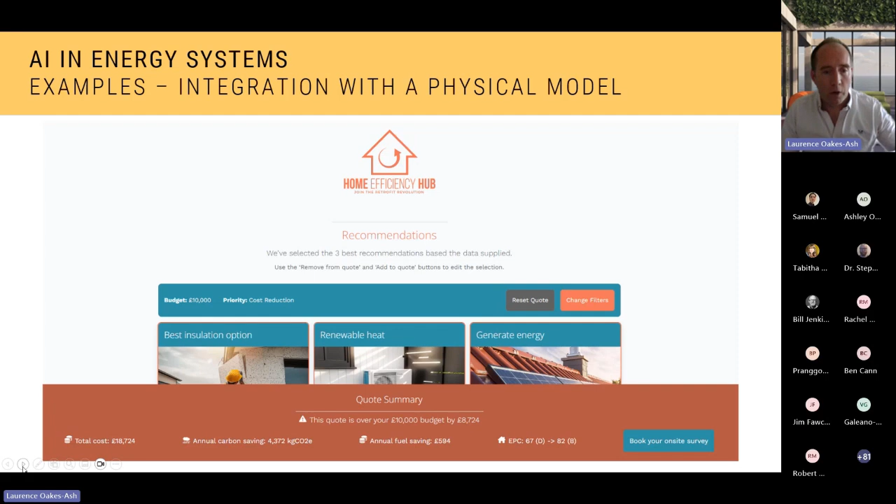To our knowledge, this is the first retrofit recommendations engine that's actually using the Home Energy Model, and I think that gives it additional credibility. So I think trust is an important component to remember whenever we're designing systems with AI in them.

The next example I want to give you is calibration. If you've looked at SMETERs, they're doing this essentially at a building by building level using AI, often to calibrate a physical model. I wanted to show you one for a network, actually a transport network, where it becomes very complicated to do this calibration. Here we've used various AI techniques to calibrate transport network models, again working with the University of Exeter on the approaches to use.

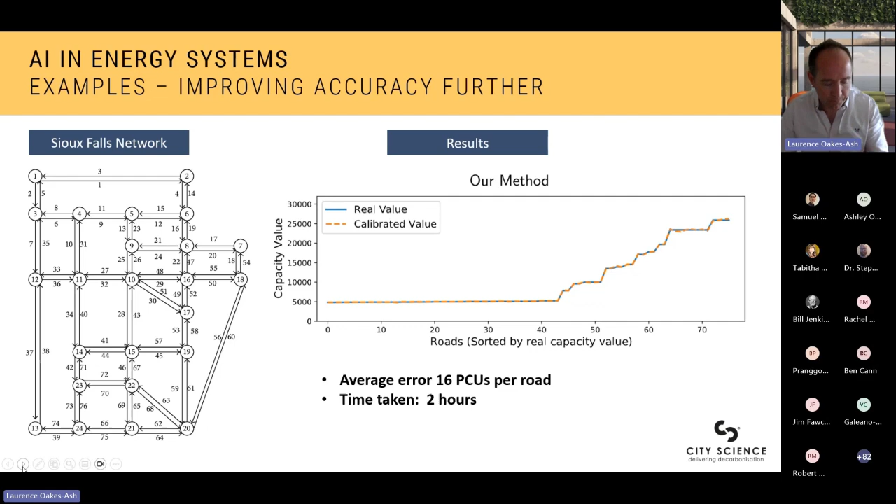But you could imagine this working for a district heat network or for an electrical network in the energy domain. And the final example I wanted to show is really what we see when we're talking about generative AI - using AI to optimize what are very complex trade-offs within energy decisions, since often energy system decision making involves multiple complex trade-offs.

It might be looking at what the carbon reductions are of a system, the overall capital cost of the system, how that cost translates into the cost to consumers, how many consumers you connect from a specific system design, and how many consumers you take out of fuel poverty from a specific design. This is where optimization methods can be really useful when combined with a transparent model.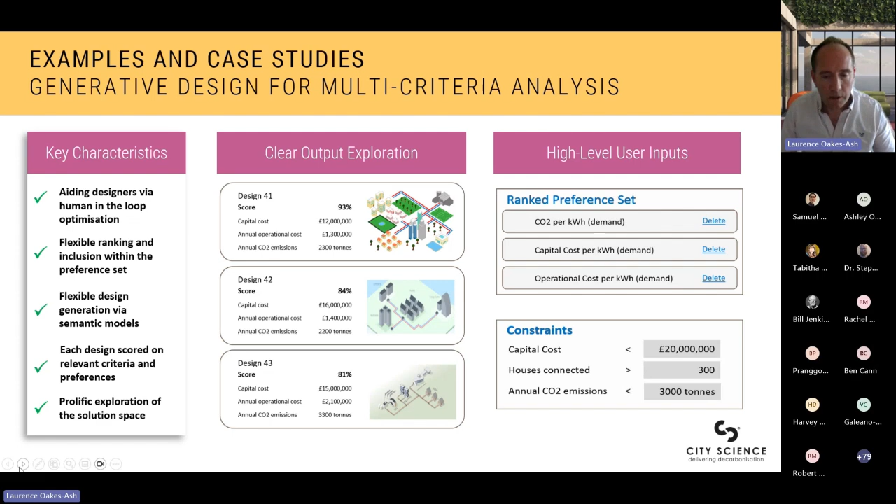Overall, we're using AI in that optimization approach to try to guide users to some of the best decisions, while also recognizing that those policy trade-offs can only really be made by a human today. So to bring it to conclusions: AI and statistical processes can add value when integrated with traditional physics-based modelling workflows. For us, dealing in the policy domain, that transparency, trust, and use of physics models is a really important component. An integrated approach, we think, provides the benefits of AI whilst promoting trust and transparency.

Making sure that there are opportunities for local data to be added in, or a human-in-the-loop approach to ensure that that data is validated. We think that's also really essential, because a lot of the models that we're developing go to some kind of scrutiny. And then we also think that model accuracy can be enhanced further by using AI at the calibration stage, especially if it's a more complex model.

And then once you've built a model that can be run again and again, or a design process that can be run again and again, this is where, using AI-based techniques around it, we can address some really complex multi-criteria policy or delivery challenges. And I think that's where we really want to see the industry get to.

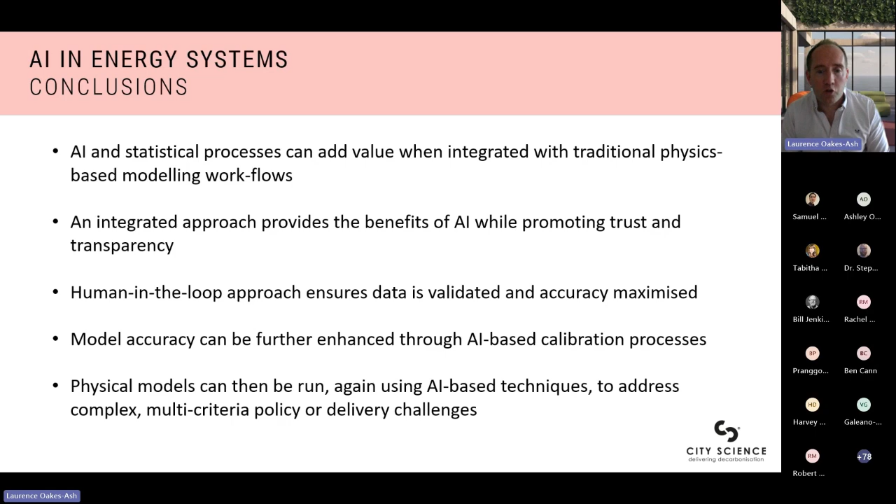So just some final remarks. How can we help at City Science? So we covered a few things today. We've got some strategic geospatial software, Cadence 360. If you scan the QR code here, you can log onto that, get some free energy data and start playing with that geospatial data. Retrofit recommendations, we can provide the software or we can provide an API. And again, that's based on a home energy model.

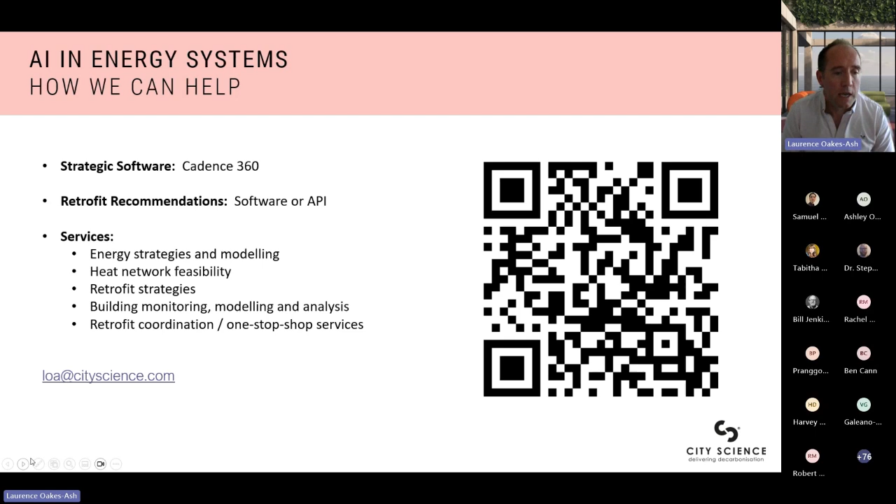That is the end of my slides. So happy to take any questions. That was brilliant, Laurence. Thank you very much for that.

I've got a first quick question. There were actually some earlier questions when Bill was chatting, but I think they're relevant here. Is the potential computational cost of AI, and also how to scale up these things. Obviously, even physics-based models can be quite computationally expensive. So is that something you're worried about or think about with these models? And also the emissions they give off, I guess, is another question.

I think it depends on what sort of time frame you're looking at, because with these sorts of systems there's often two main time frames that people care about. One is the strategic time frame, where it's not a problem to have things that take a day or so to run. Then there's the real-time time frame, where invariably that is much more challenging from a computational perspective. So that's where usually it will be a simplified model or an emulator doing that if it's going to be done in real time.